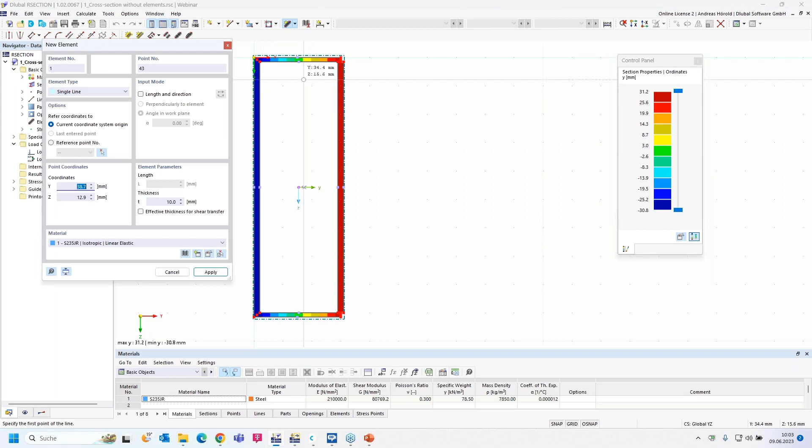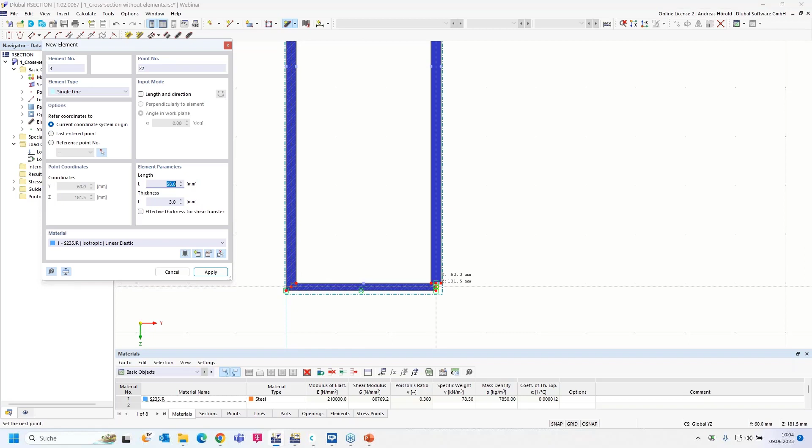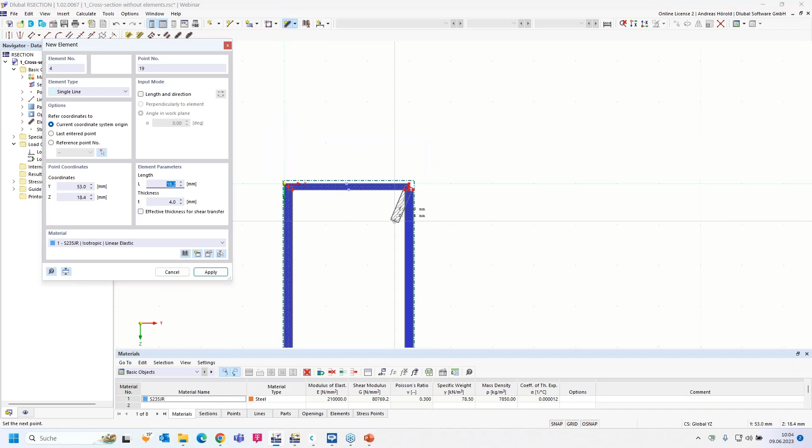How to do that? On the top menu you can see 'new element'. I use a single element, and define the first element here with a thickness of 3 millimeters. Then the next one, that's the web, and that's 4 millimeters thick. Then 3 millimeters. Then the last one, 3 millimeters - no, that was wrong, that is 4 millimeters. We can delete it, that's no problem. Again the element, 4 millimeters. Okay, that's all. Then I can calculate the cross section again so we can see all is fine.

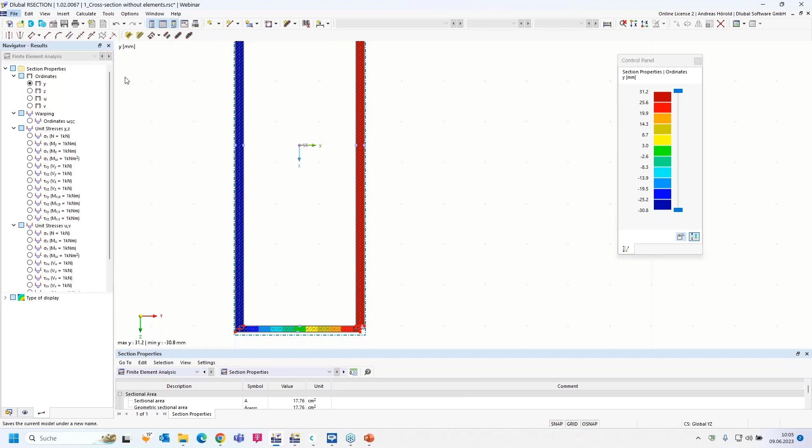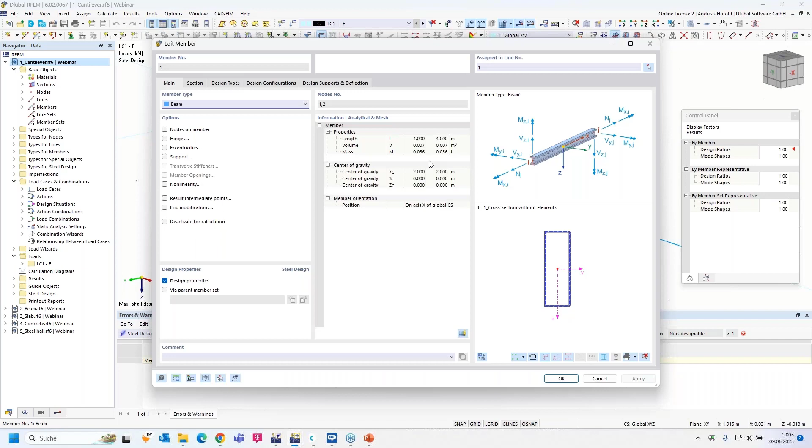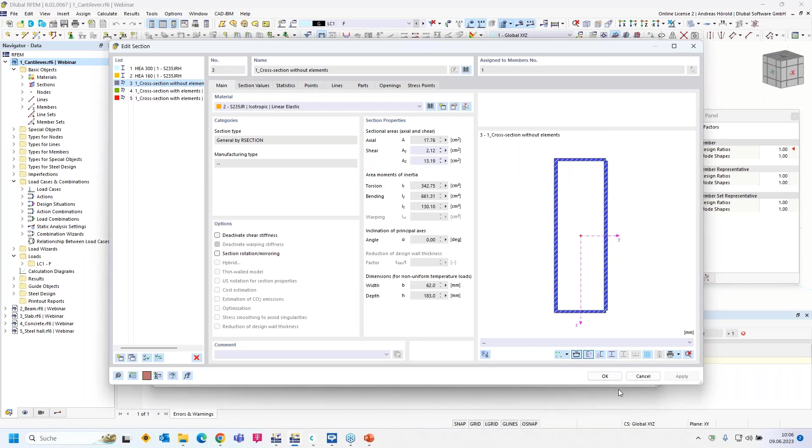All is fine, and I say file, save as, cross section with elements this time, and I overwrite the old one. Then I can go to RFEM 6, double click on the beam, go to section, and edit the section. I go to the library here at the top, and select from RSECTION, choosing the cross section with elements this time. Now the design should be possible.

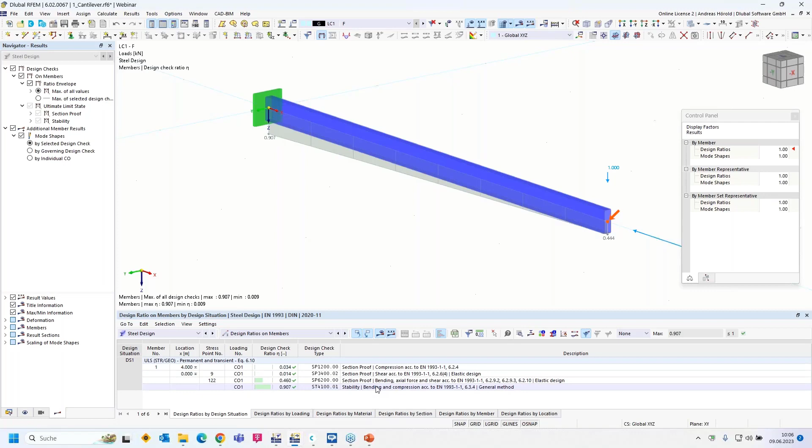Those elements are necessary for the classification of the cross sections. You can see, for example, when you go to the section proof, the section classification here, with all the formulas from the standard and so on.

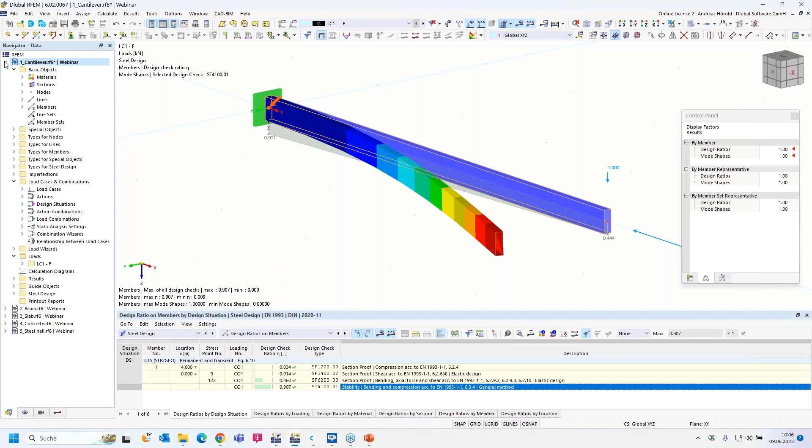So I turn to the next model and the next question. The next question is: why is my cross-section non-designable? Now you can see the error message from the steel design add-on: maximum allowable thickness of material exceeded.

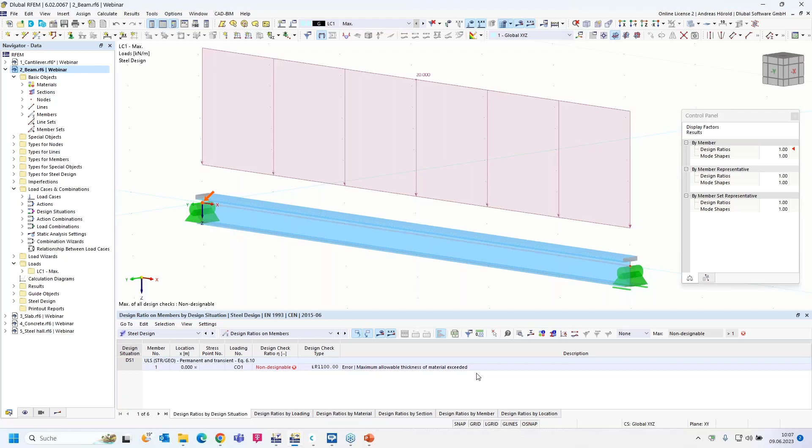So we can double click on the member and go to the section. Let me introduce the cross section - you can see it's a fictive cross section with a very thick upper flange, 45 millimeters thick. When I go to the material, you can see there are only values available until a thickness of 40 millimeters.

How can you correct that? There are two possibilities. The first possibility is to go to the main tab and check here 'user-defined material', and then you can enter the values for the maximum thickness and the yield strength.

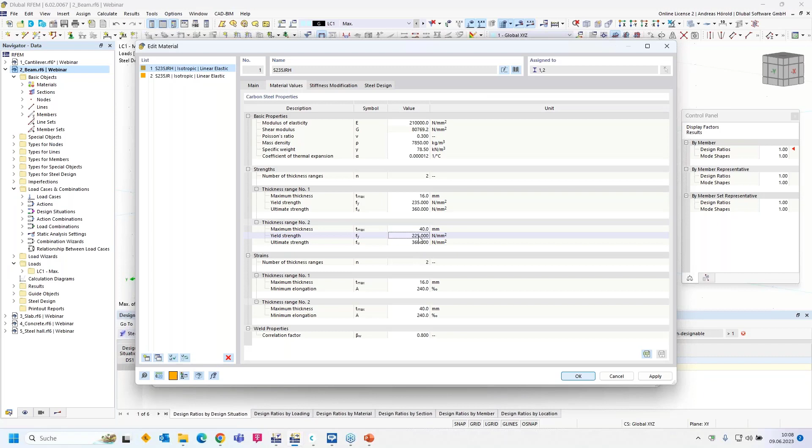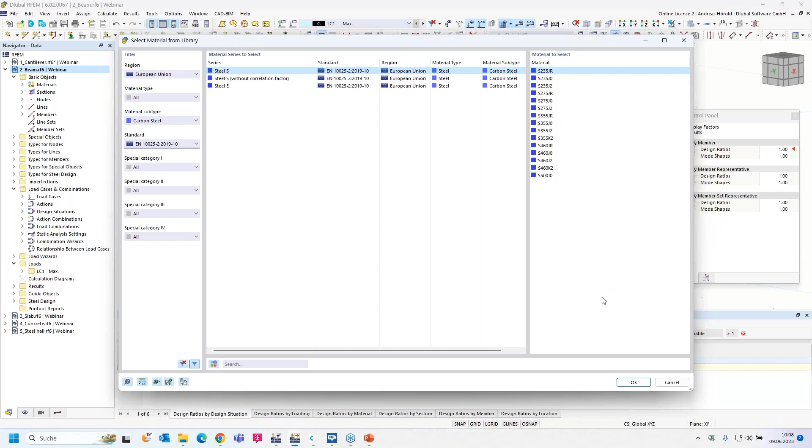But the better option is to modify the material, or create a new material: European Union, carbon steel, and I know in this code the S235 grade has more values. Now you can see the different thicknesses, 40 millimeters, then 100 millimeters as maximum thickness, and you can see the decreased yield strength. Okay, I select this material.

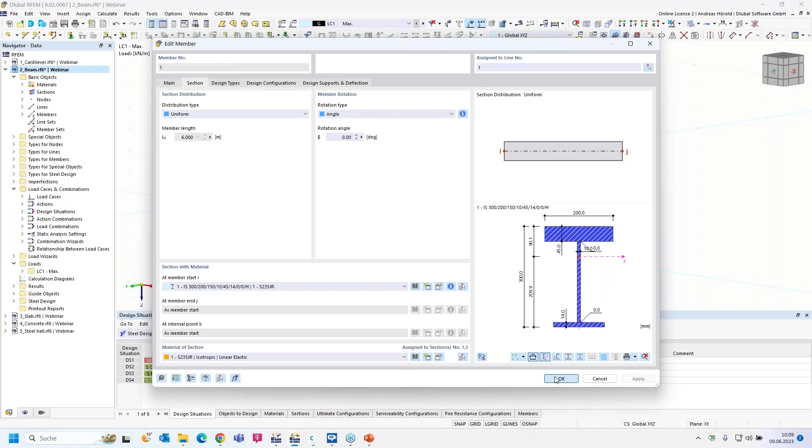Okay, and then the calculation or the design should be run. Okay, now it's okay, we corrected this.

It happens often that users choose not a wrong material, but a material that's not valid for thicker flanges or thicker members or parts of members. Okay, then we turn to the next model and the next question.

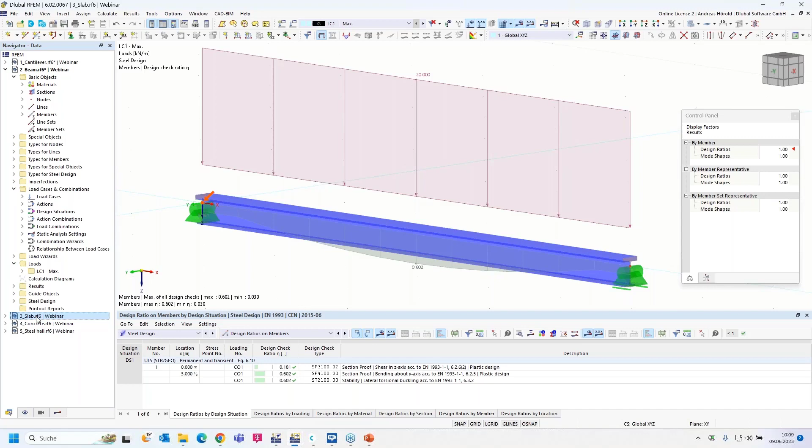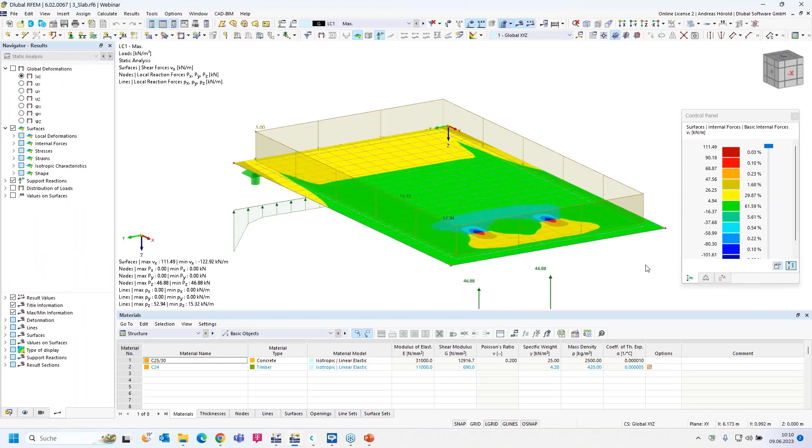A simple slab. The question is, is it possible to calculate the spring of a column for a nodal support by the program without modeling the column? If we show the results, you can see through the RFEM calculation there are singularities.

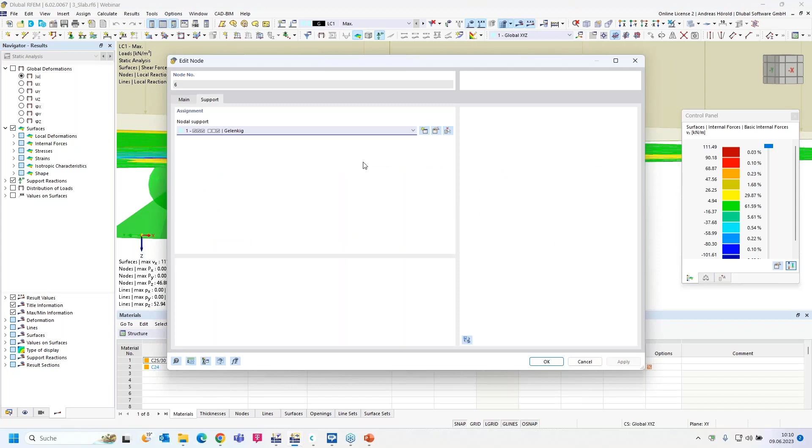We have, for example, columns under the slab, and we defined only nodal support. Let me double click on the nodal support, on one nodal support, to modify it. I create a new nodal support.

There is this option available: stiffness via fictitious column. If I go to the table, this fictitious column is recommended for point supports of 2D systems. Here you can determine the support spring constants. You can see them here from the parameters of the column that is not represented. So let me go through the single options.

You have different options for the model support. I'll come back to that later. You can define a rectangular column head, or circular, and define the dimensions. I change the dimensions, and when I change the dimension, you can see the changing of the spring constants. Just take a look at them here. Then, for example, you can enter a different column height.

Then, for example, rigid at the column base, or semi-rigid, or hinged. And you can also consider a shear stiffness of the column. Then you can choose a different cross section of the column if it is different than the column head. Here you have to define the material.

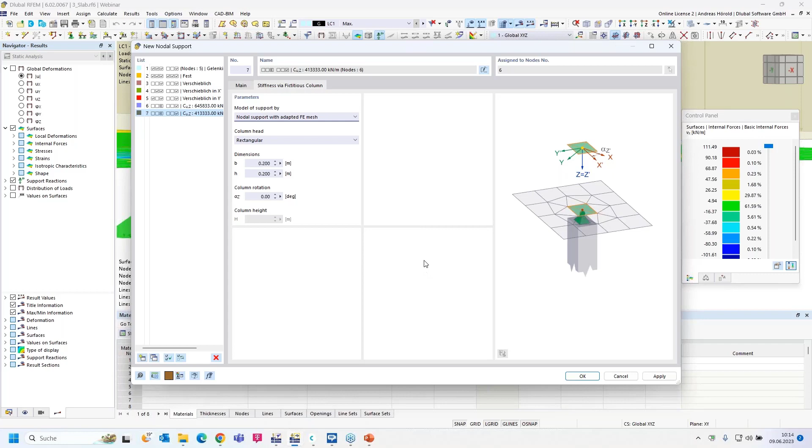Then the last option is the nodal support with adapted mesh, and this model corresponds to the elastic nodal support, the second one. But no springs are applied to the point-like supports. You can see that here, and you can also see that there are no springs.

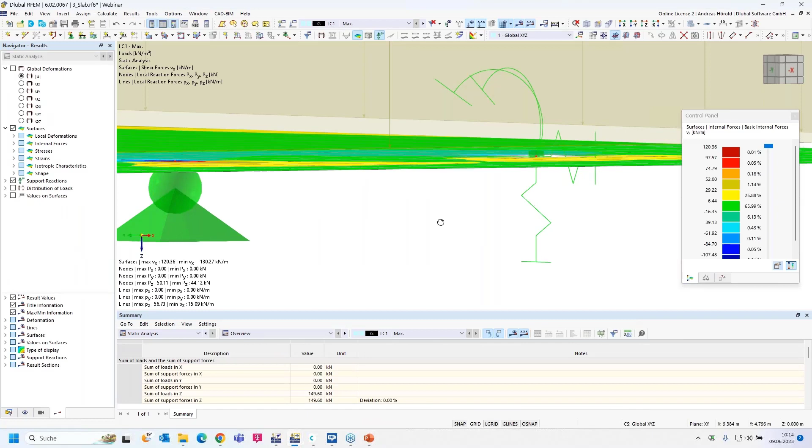We choose the first option, okay, and we need to calculate all again. So, and you can see there are no singularities anymore for this nodal support with the fictitious column. Okay, then we turn to the next model and the next question.

The next question is, when I select a certain object, why aren't the associated objects shown in the navigator views? So let's go to the navigator views here, left at the bottom. You can see the navigator views. So, if I activate a view, for example, for the surfaces...

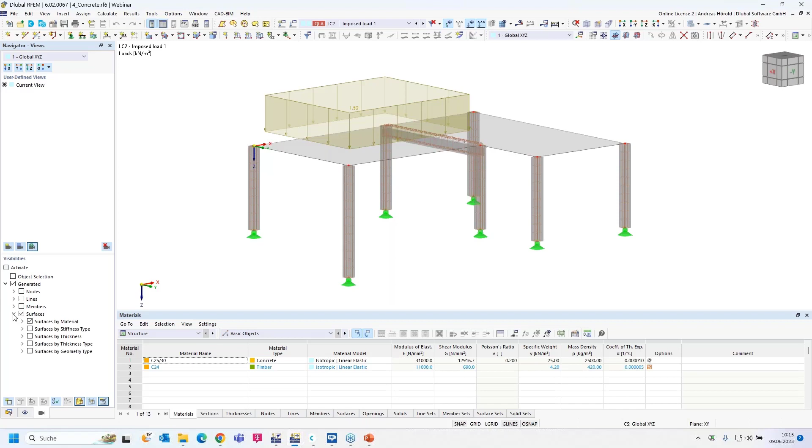There's only one surface, and you can see the surface is displayed and selected, but no lines, no nodes, and so on. No loads and no nodes. And how can you avoid it?

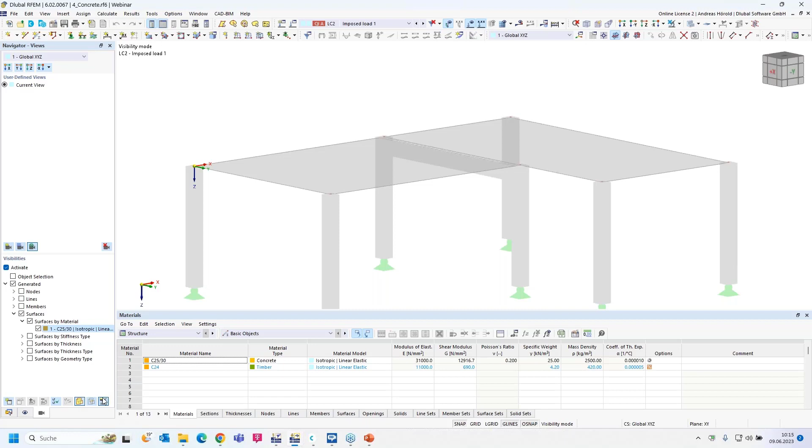Here left at the bottom, there are the buttons, and on the right you can activate or deactivate the ignore related objects function. If I deactivate it, then you can see also the lines, nodes, and the load that belongs to the surface. And if the function is activated, associated nodes and lines are hidden, as you could see.

Okay, those are the different options. Yeah, a quite hidden button. Okay, that should be all to this model and this question.

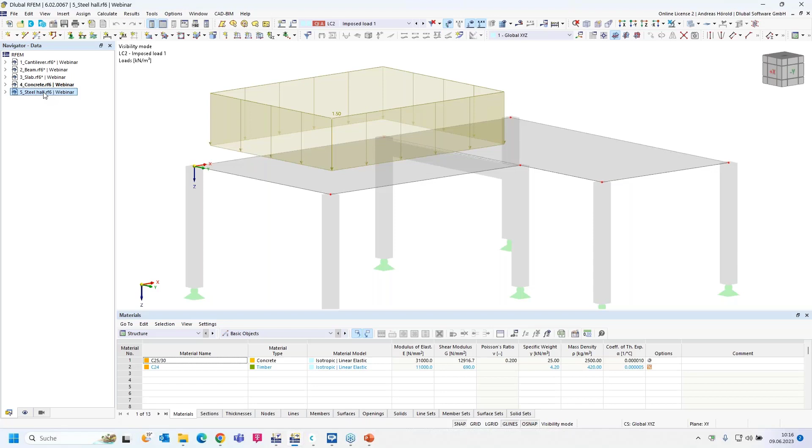Turn to the next question. The next question is, when designing steel structures, I get a message that bending about the z-axis is not applicable for the general method. What can I do to still perform a stability analysis?

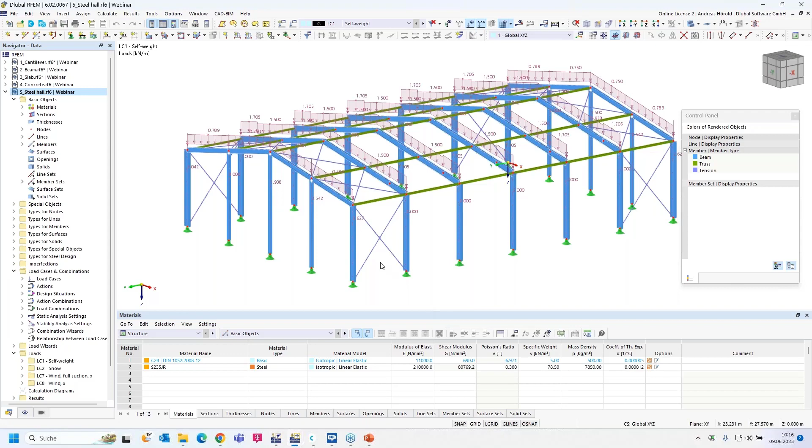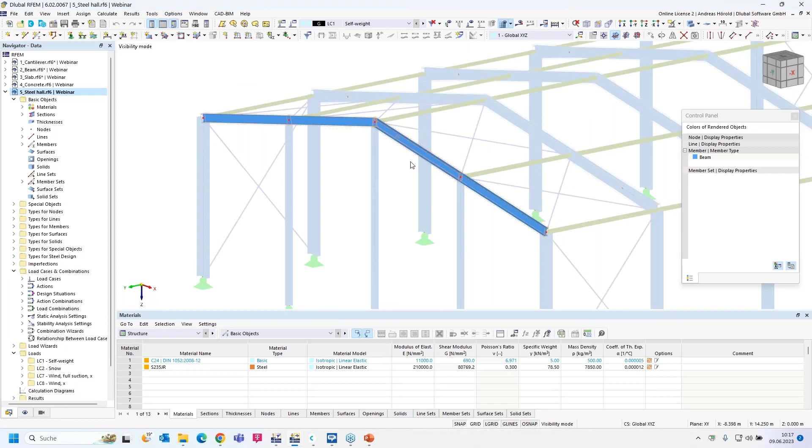Let's do that on an example. I would like to design this member or this set of members. I select only this member and use visibility by selected objects. I double click on the set of members.

For design type, I select this design type. For boundary conditions, I define the nodal supports. I click on the member set, and the program recognizes the intermediate nodes.

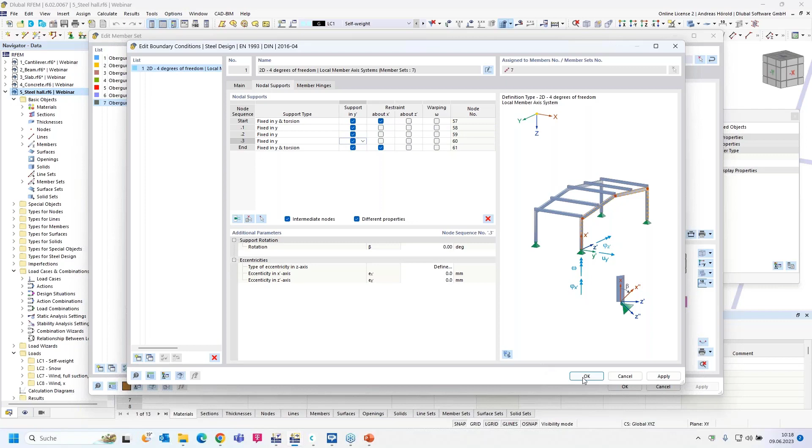I would like to consider also a support in the horizontal direction through the coupling members. You can see the supports here. We can run the steel design to design only this member set, member set 7. Let's run the calculation.

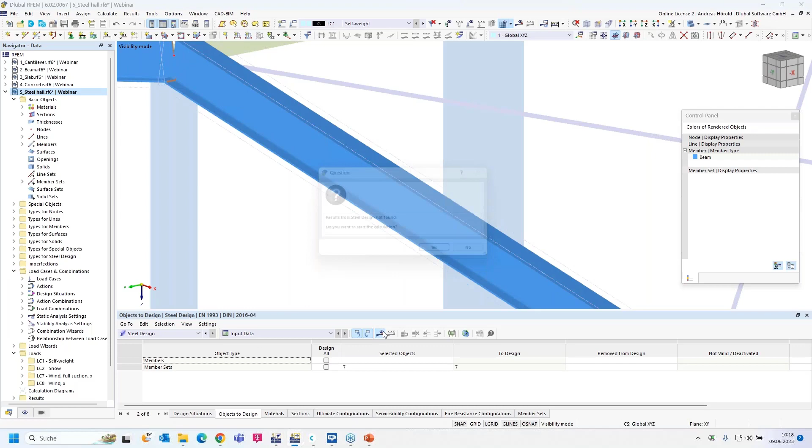Now we get the mentioned error message: general method according to Eurocode 3, 6.3.4, is not applicable for bending about z-axis. The reason is that the member set is designed according to the general method, but this method is only allowed for loading applied in the load bearing plane, that is without transverse bending moments. That's why the warning appears.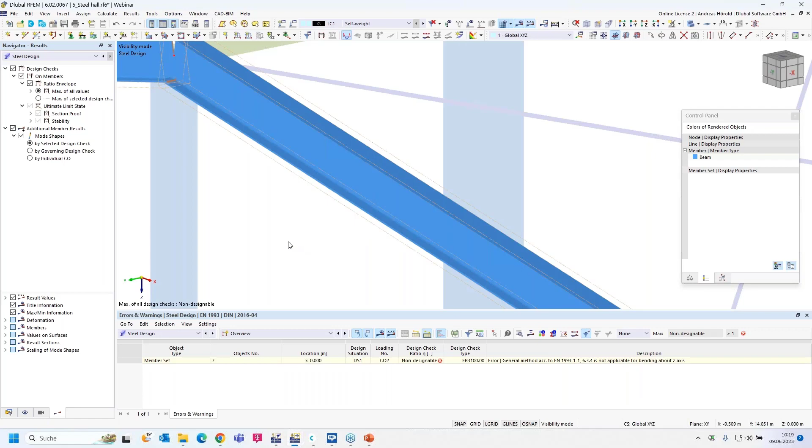There are different possibilities to avoid that. One possibility is to use the torsional warping add-on, which allows you to perform a stability design according to a second order analysis as a cross-section design. But there are also possibilities to avoid using the torsional warping add-on, and you can do that with the steel design add-on.

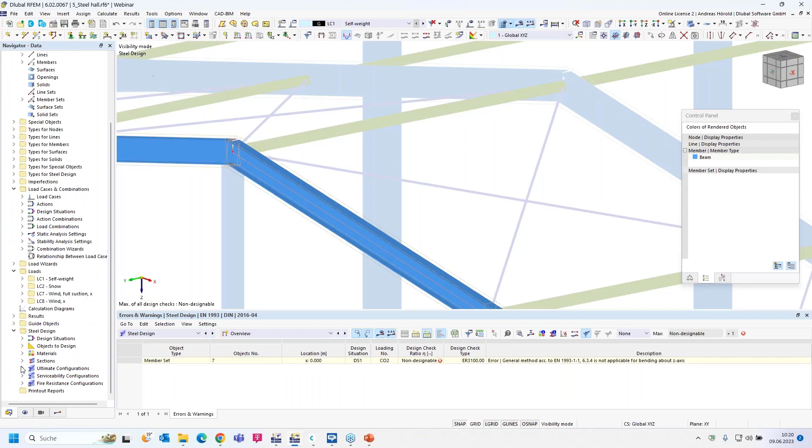As an alternative, you can activate the transverse bending in the ultimate configuration. I open the navigator data, scroll a little bit, and under steel design you can see the ultimate configuration. I double click on that, and if you are sure that you can ignore the Mz, then you can increase that value here. That would be a possibility.

Another possibility is under the Stability tab: you can check the extension methods and then the adapted method, and this enables double bending.

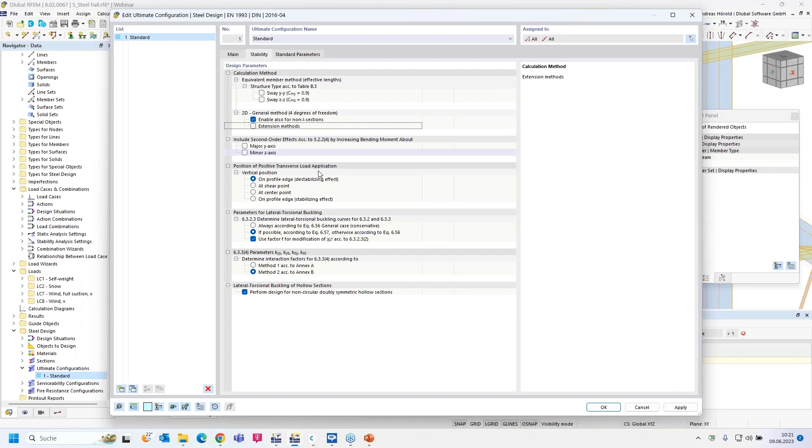Those are two possibilities. Another possibility is to go in the member editor again and change the design type from the general method to the equivalent member method. That's why I have to define effective lengths here.

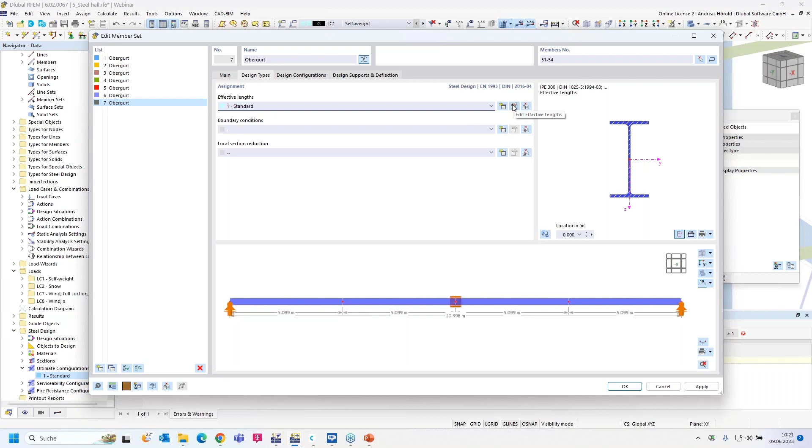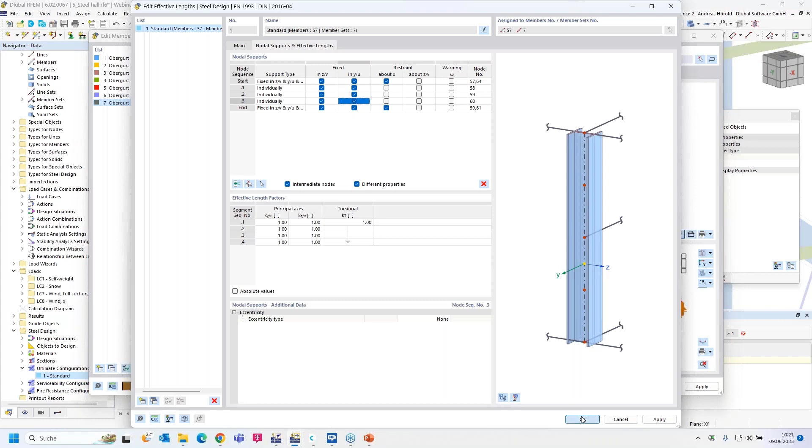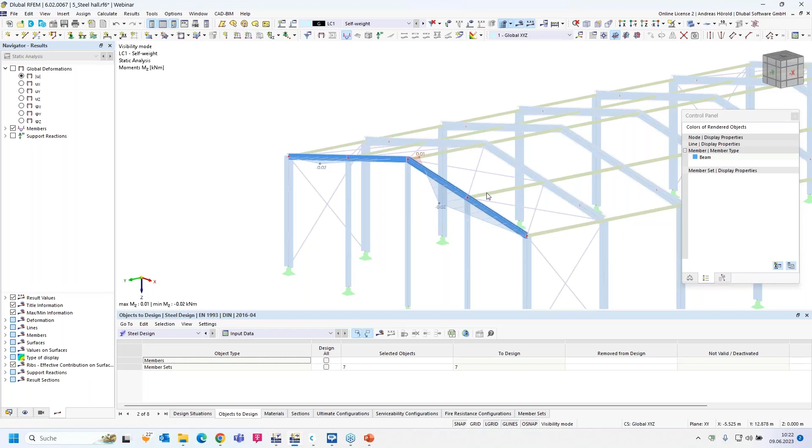For node supports, I can read the intermediate nodes again, and then I check the Z direction and U direction as support. You can see the supports here, in the global Z direction through the columns, and in horizontal direction through the coupling members. I run the steel design again, and now you can see all is fine.

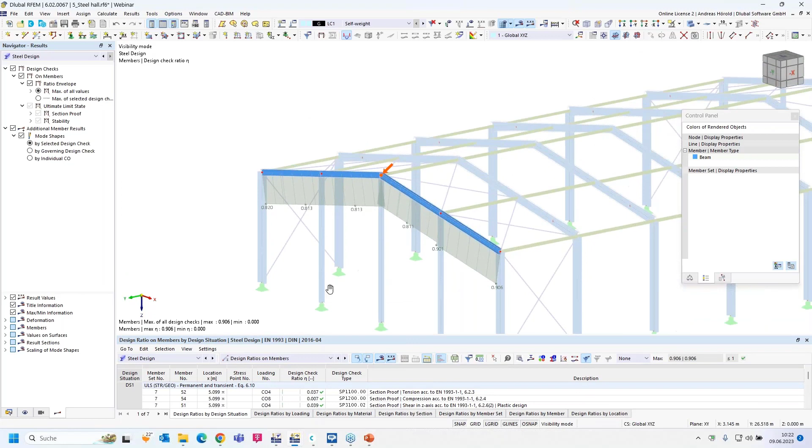We stay in the same model, but turn to the last question for today: how can I create as quickly as possible a rigid connection for a ridge with an end plate using the steel joints add-on?

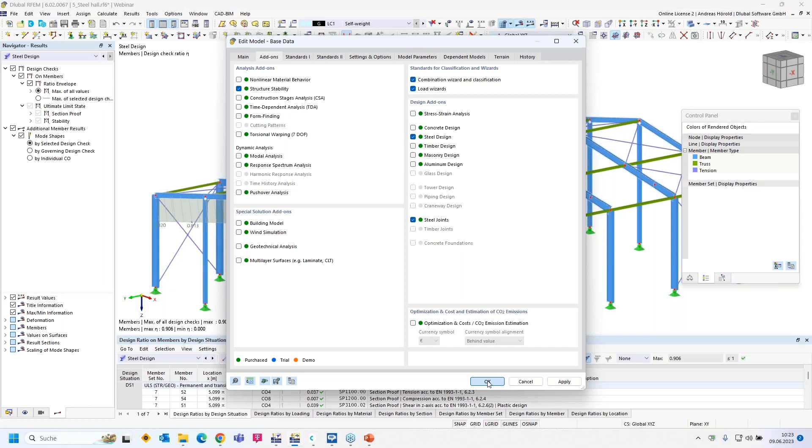First you have to activate the steel joints add-on here, left at the top, and under add-ons you have to check the steel joints add-on. Then we go to the design situations, where the steel joints add-on is automatically checked on for the design.

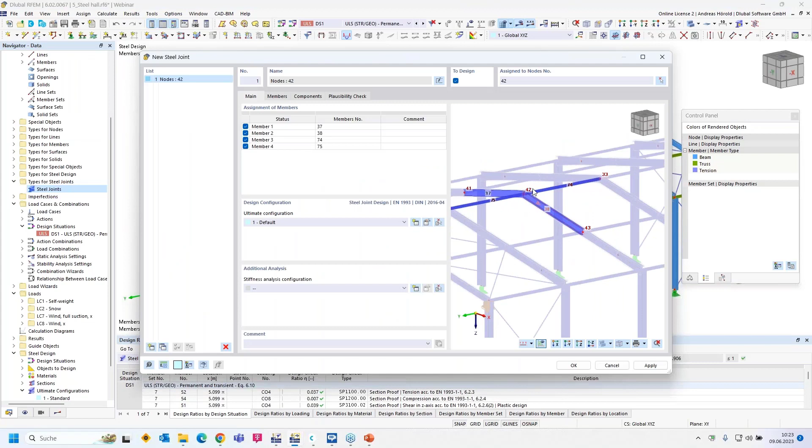Under types for steel joints, you can double click here, for example, then assign a node, and check on or select more nodes. In our case, the coupling members are not of interest, so we deactivate them. I go in the members; at least one member end must be supported. Material section, we don't change that.

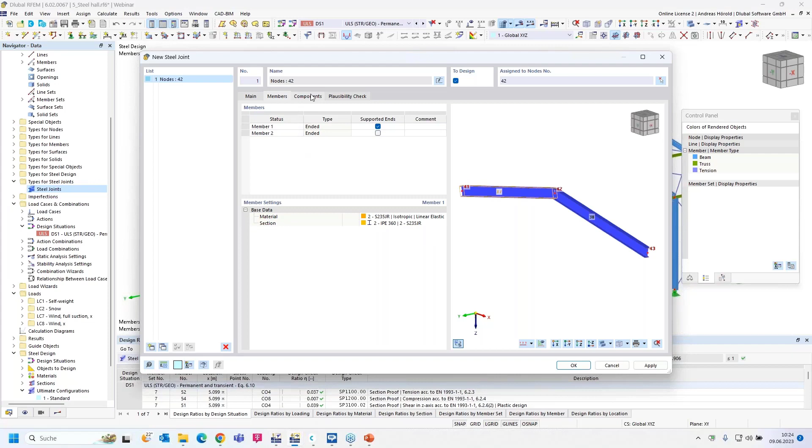Under components, we would like to create two end plates here. You can do that with the components. There are different components, and you can see the plate-to-plate component here. We have to do some modifications, but I delete that. I would like to show you also the other possibility with the component library.

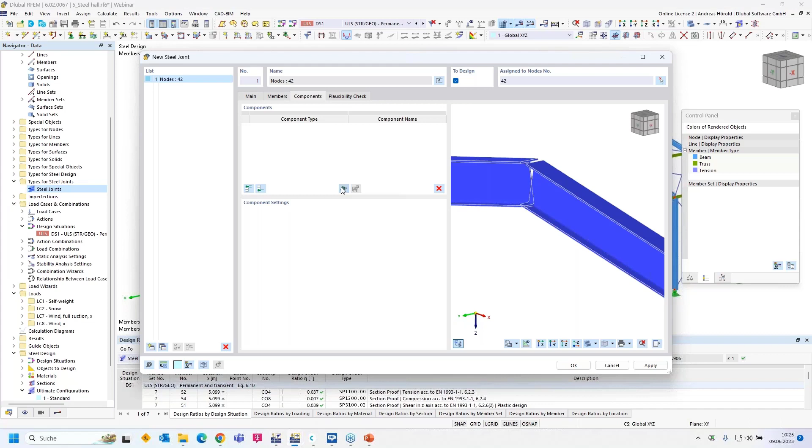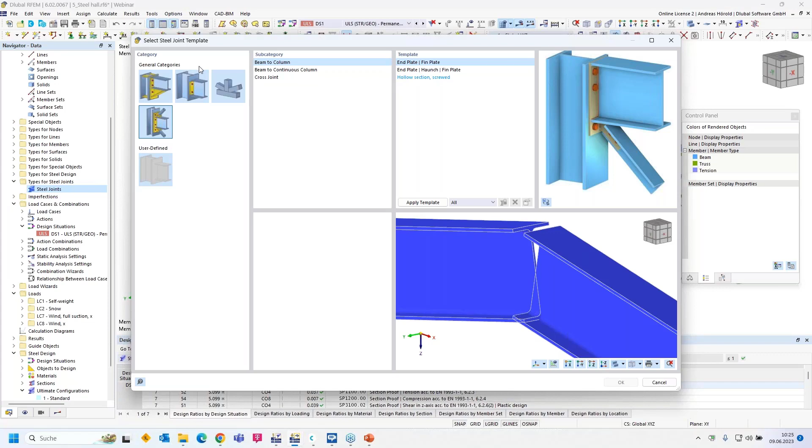There are much more connections also for rigid. On the left side you can see the rigid components with haunches and so on, for beam to continuous column and so on. Then the pinned connections, beam to beam, such components. Then the trusses, K joints, T joints, X joints, and so on, and the bracings. Already a lot of components, and of course we extend that library continuously.

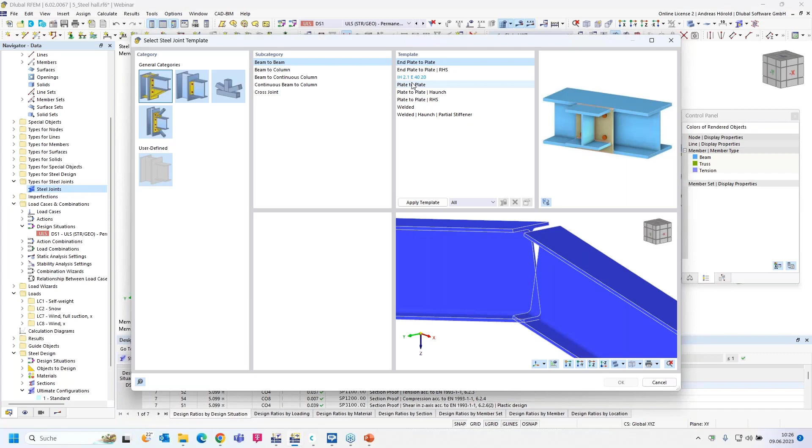So we have got the category rigid and beam to beam, and we select plate to plate here. If I apply the template, you can see the preview here, and we can press OK, and it overtakes that. So the half angle is already OK. You can select also perpendicular, but we use half.

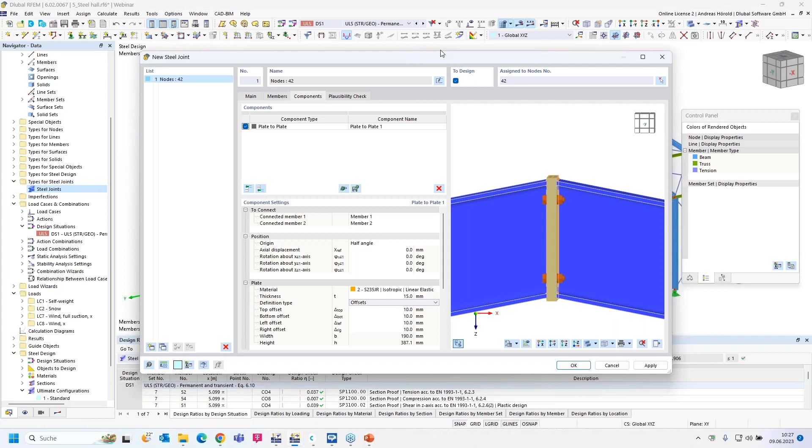So the material should be the same as for the members, S235. And as thickness, we use 15 millimeters. I increase the window a little bit. Okay, also in that direction.

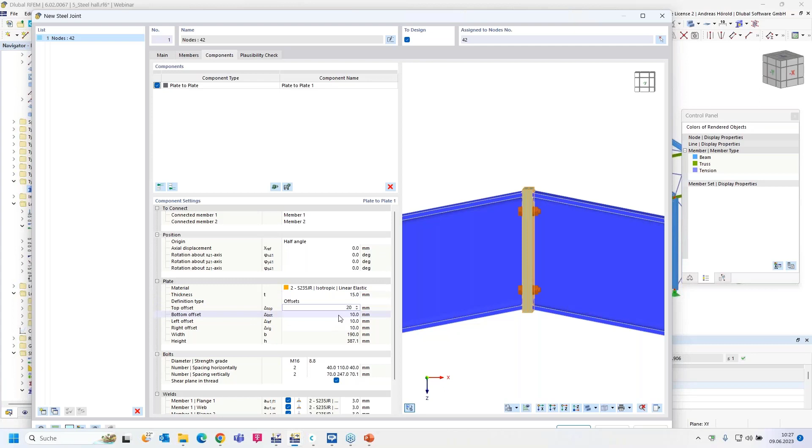So then for entering the plate parameters, you can use the offset or the dimensions and position, as you like. And now I enter my values here. 20 millimeters for the top offset. You can see all changes directly in the preview. You can also define a minus offset. For example, if you have trapezoidal sheets at the top of the flanges, then such a connection or such an offset would be better. We don't have that in our example.

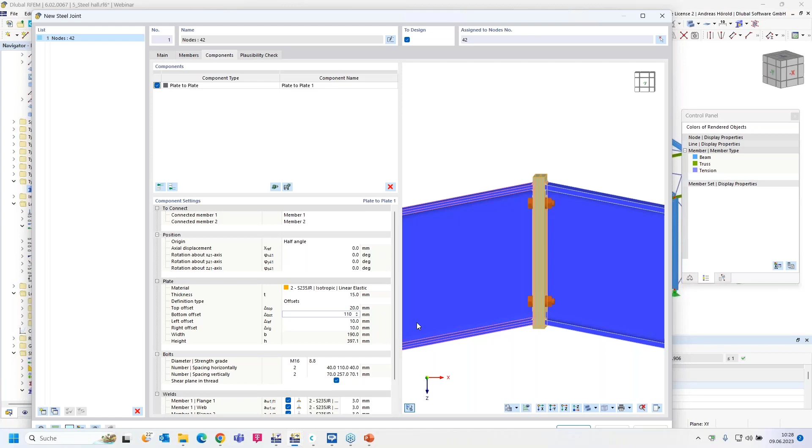So 110, 10, 10, 190, yeah, all the parameters are quite okay. Then we turn to the bolts.

We have to select the diameter, from M12 to M36 are available. I select M16 and I select the strength grade 10.9. The spacing horizontally is already okay, but we want to have 6 bolts in the sum.

And I have to enter the spacings, at least the first 3 parameters, 169, 180, and the third parameter is calculated automatically. You can select or consider the shear plane in the thread or in the shaft if you want.

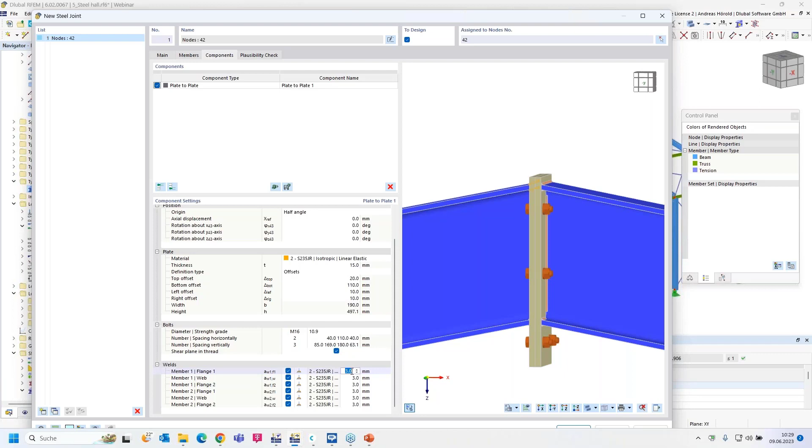So then we have to define the welds for the flange, 6 millimeters, web 3 millimeters, flange 6. And on the right side you can see which value you define. So now the lower flange, the weld of the lower flange. Okay, that's fine.

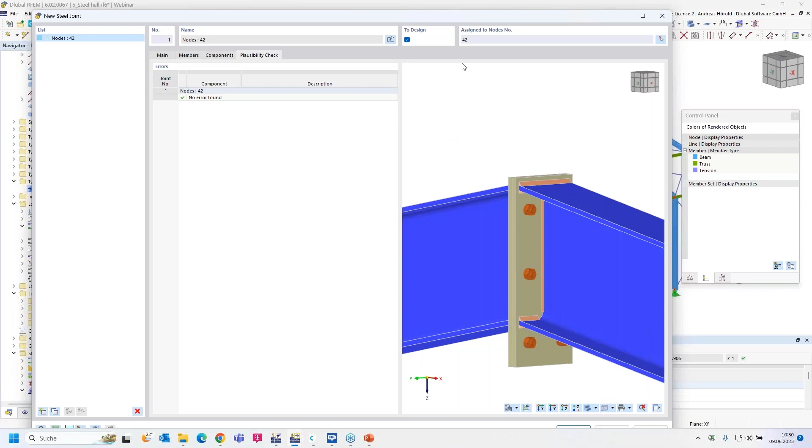We turn to the plausibility check. No errors found. So I can leave the dialog and we can run the steel joints calculation.

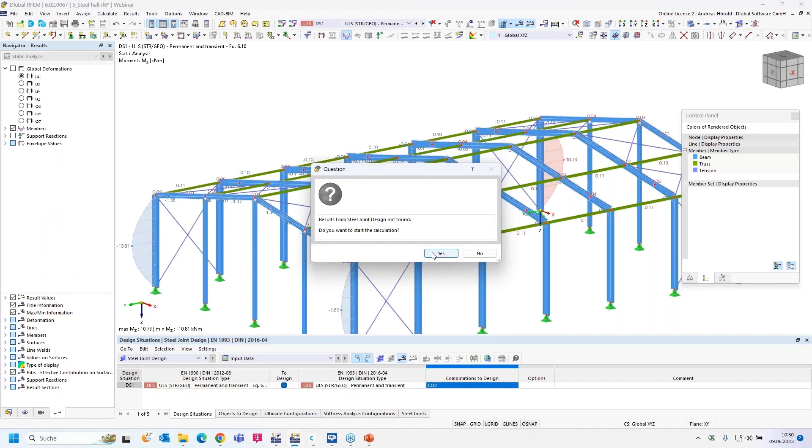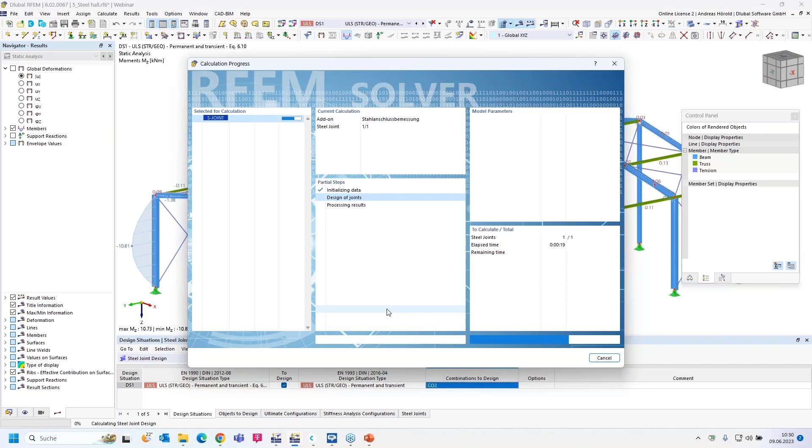To not have to wait too long, I select only the maximum combination, number 2. So I can run the calculation. With the calculation, there will be created a submodel with surfaces and so on. That's quite complicated, that's the reason why it takes a short time.

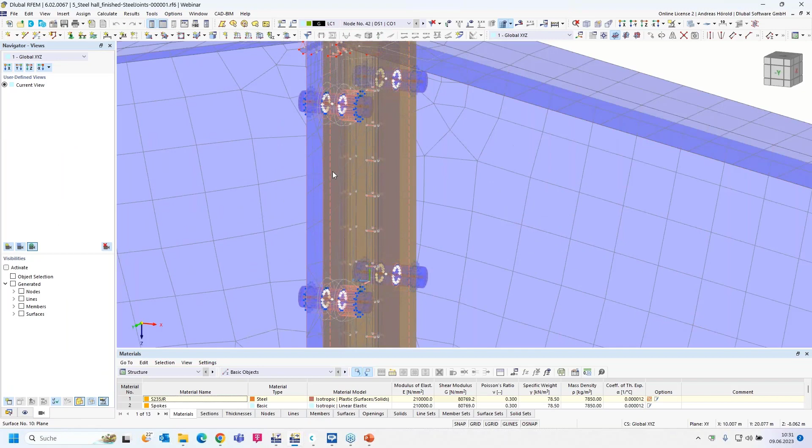While the calculation runs, I can also already switch to the submodel. I saved that previously, that's the submodel. Now you can see, where I don't display the results, the plate here, then the bolts, with such spokes that are help members.

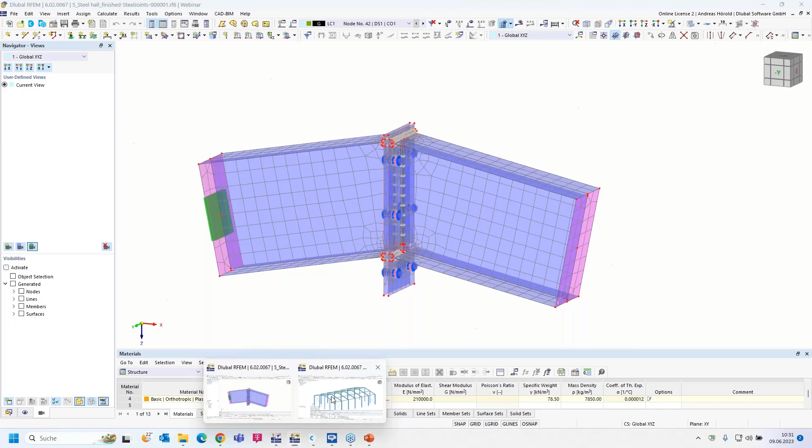So then here you can see the weld, the surface of the weld, and then there are such rigid links. And that's the submodel that is calculated in the background, and usually you only see the results here.

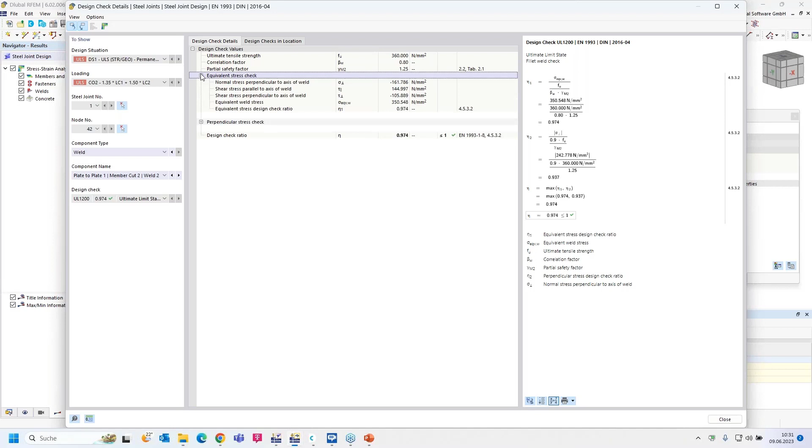The calculation is finished. I can double click, for example, on that line here, and you can see all the formulas, in that case for the weld. And you can see also where the formulas are in the code.

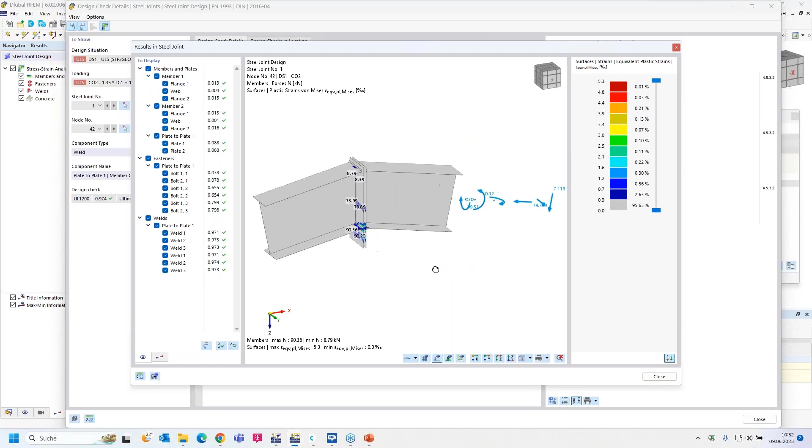So if you click on the left side here, above on the left side, results in steel joint, you can see the surface model with the results. You can deselect, for example, some parts of the results to, for example, show only the welds and the fasteners, or only the welds. And by pressing that button, the submodel, the steel joints model, will be saved. That's the model what I showed you during the calculation.